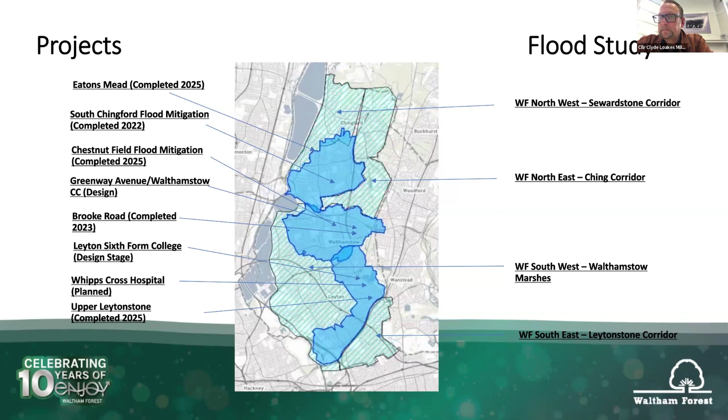So one of the big first schemes was a traditional SuDS scheme in Esther and Wadley Road. And very interesting, these two roads run parallel to each other.

Very short terrace property roads, but they're at the bottom of a hill, and the Filly Brook, that culverted river, runs beneath them. Interesting, when we came forward with a scheme, and it was to remove a load of parking from the area and put in permeable surfaces and rain gardens.

Esther Road totally endorsed this approach. Straight away, they wanted us in there developing this scheme, recognising that they were losing car parking spaces. But of course, you can move a car when a flood's on its way. You can't move your house. So they understood some of the very basic principles.

Wadley Road, however, the residents there were not interested. They saw these schemes as impacting the value of their properties, because they would be losing car parking spaces outside their homes. So we got on with Esther Road and we delivered it. And what do you know? All of a sudden, residents in Wadley Road wanted to be reconsulted. They saw the difference that it was making almost immediately.

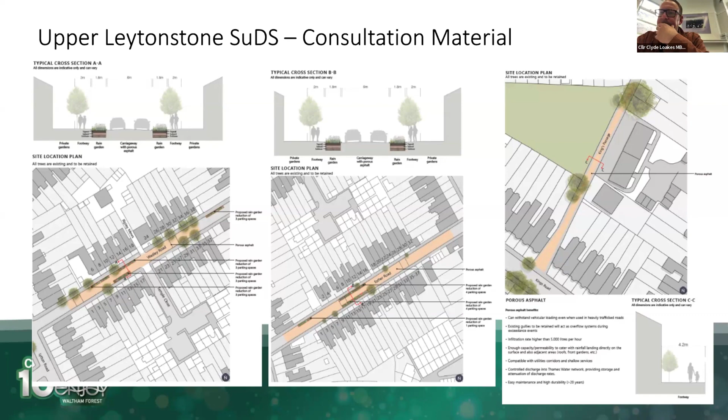And here's what we did. And of course, once you dig up some of these roads in their entirety, you start to uncover a whole myriad of other evils and sins. So once we uncovered these roads, other pipes started breaking, snapping from other utilities. So it meant we had to get the other utilities in to kind of upgrade existing pipe works under these road surfaces.

What we've also done is rolled out free water butts in these roads as well. So we've kind of worked on the principle, getting as much water off the streets during a flash flood is the most important thing. Next slide, please.

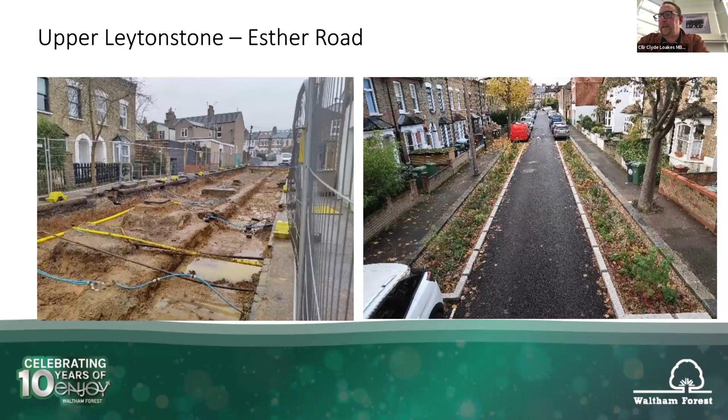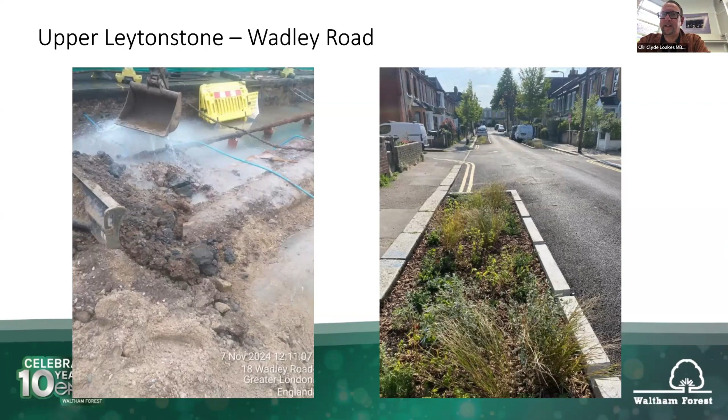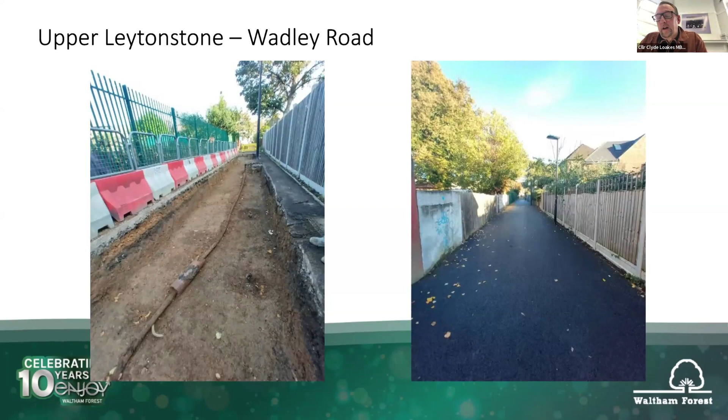Some are a little bit more challenging, but certainly not as challenging as putting big pipes under the ground. But they do all contribute and work together, and that's why we've got this kind of holistic scheme that tries to hold water back as far up the Filly Brook as possible.

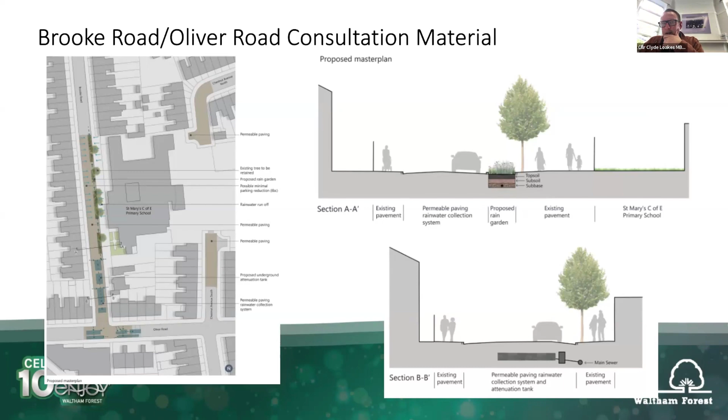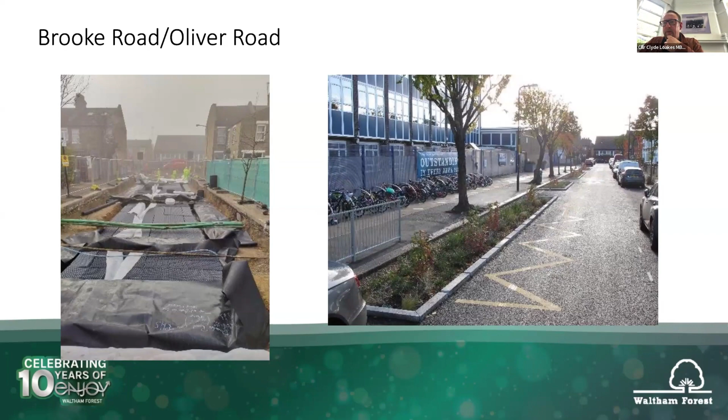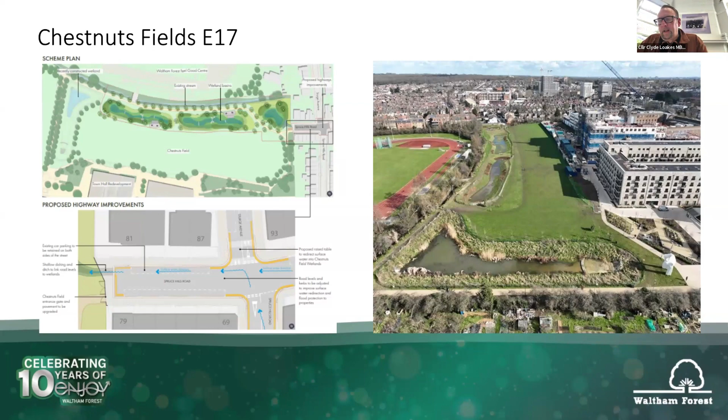Next slide, please. This is a bigger scheme that we've done with some wetlands at the back of the town hall. This is to ensure future residential areas don't get flooded. We just had a big dog walking field for all intents and purposes, and we've scooped out huge amounts of soil, and we put in drainage systems that are now sites of beauty and nature, as well as fulfilling flood resilience for that local neighbourhood.

It's now an attractive place that's adding extra value to our biodiversity and nature recovery in Waltham Forest, as well as offering that flood resilience approach. Next slide, please.

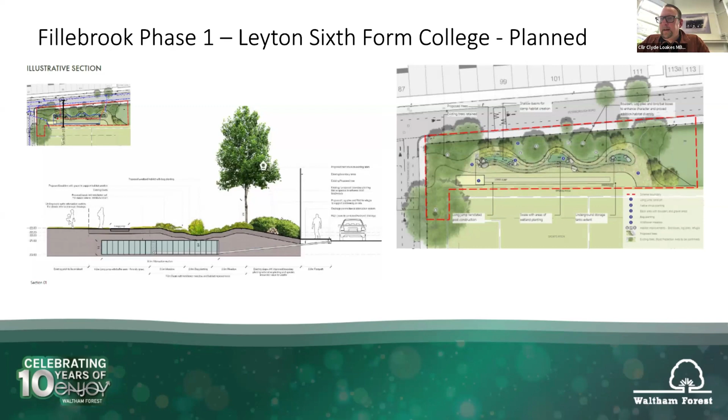We've got another couple of schemes coming up. One's around Leyton Sixth Form College, again along the route of the Fillebrook. This is due to go to planning at the tail end of this year, and we hope to be building this in the new year. But again, working with the DfE to help bring that scheme about. Next slide, please.

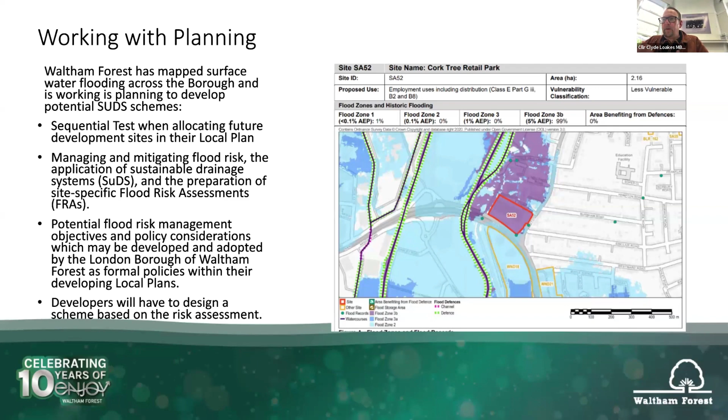And this is a little bit of a more difficult slide for me to explain, but it just fits into the range and the approach that we have to undertake, and some of the science that's involved in identifying the areas at risk and the plans that we need to put in place. But it's really important to keep having that pipeline of schemes going, because you never know when there might be some money available to implement one of these schemes. Next slide, please.